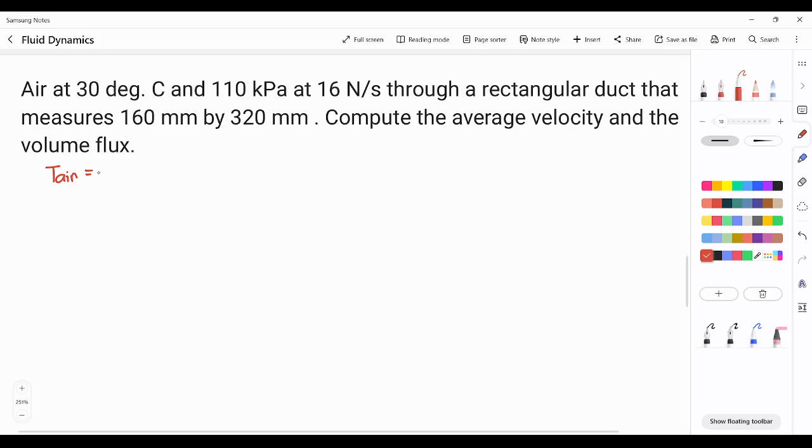Basahin natin, guys. Air at 30 degrees Celsius and 110 kilopascals at 16 Newtons per second through a rectangular duct that measures 160 millimeters by 320 millimeters. Compute the average velocity and the volume flux. So, ano yung given natin? We are given a temperature of air, which is 30 degrees Celsius. We are also given pressure, yung pressure ng air natin, which is 110 kilopascal.

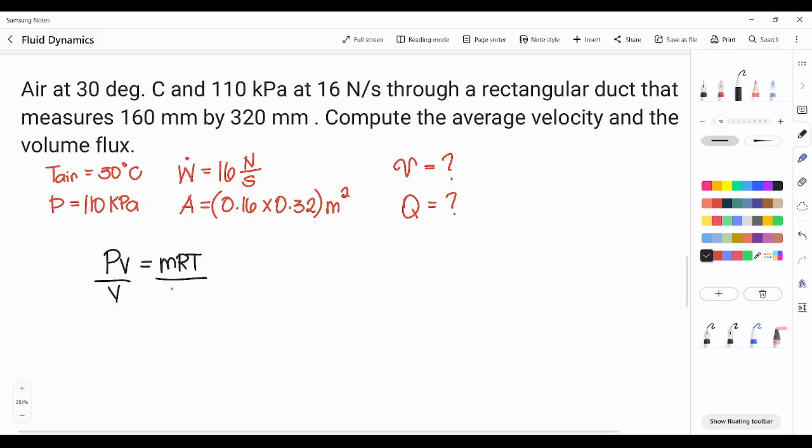Pero pag dinivide natin, divide both sides by the volume. Cancel lang yung volume. Tas mass over volume is what? Density. So, pressure is equal to rho RT. And to get the density is simply the pressure divided by the gas constant R times absolute temperature. Alam natin that gamma or the specific weight is equal to rho g.

So, let's first get the density. The density is equal to the pressure over the gas constant times the absolute temperature. Again, the pressure and the temperature should be absolute when using the equation of state of an ideal gas. In this case, absolute na siguro yung 110 kilopascal since walang naka-indicate na gauge siya. So, 110 kilopascal, which is kilonewton per square meter.

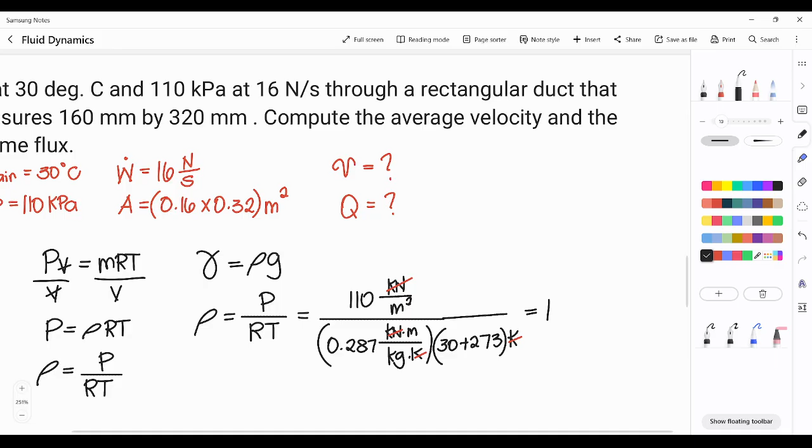And from here, you'll notice na magka-cancel out yung units natin properly. Cancel yung kilonewton, cancel yung Kelvin. Itong meter papasok doon, so that will be cubic meters. Tapos yung kilogram tataas. Our resulting value will be kilogram per cubic meter. That is density. Let's use 4 decimal places: 1.2649 kilograms per cubic meter. So, yan yung density ng air.

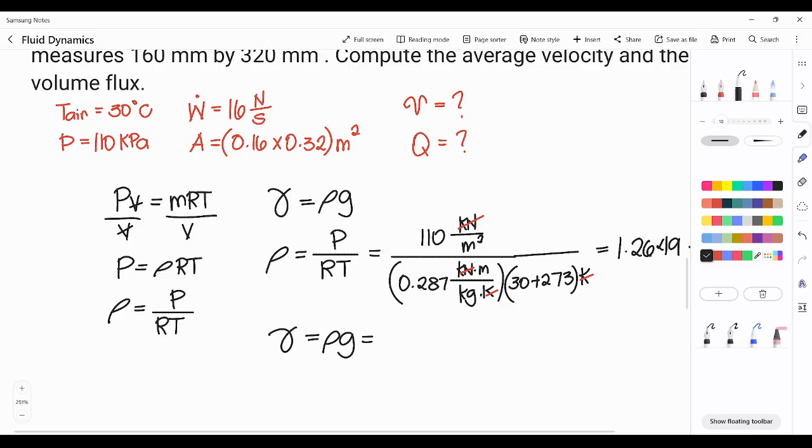So, we can use this formula to find the specific weight. Specific weight ay weight over volume, and weight ay mass times gravity, so mass over volume is density, kaya siya naging rho g. Density 1.2649 kilogram per cubic meter times g, 9.81 meter per second squared. Kilogram times meter per second squared is Newton, so we end up with Newton per cubic meter: 12.41 Newton per cubic meter. So yan yung gamma natin.

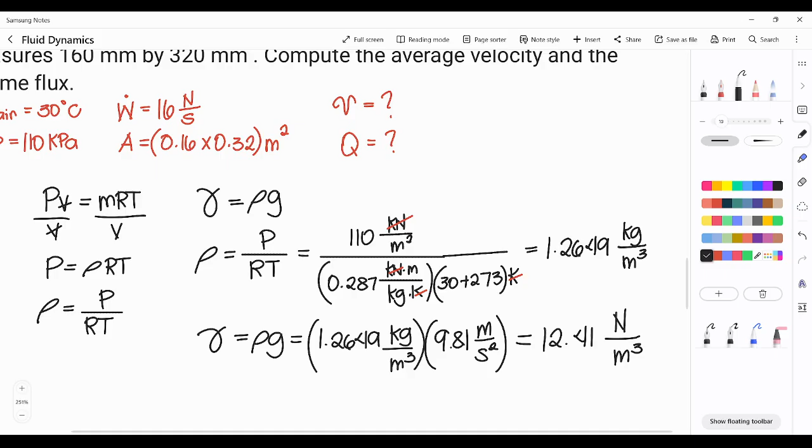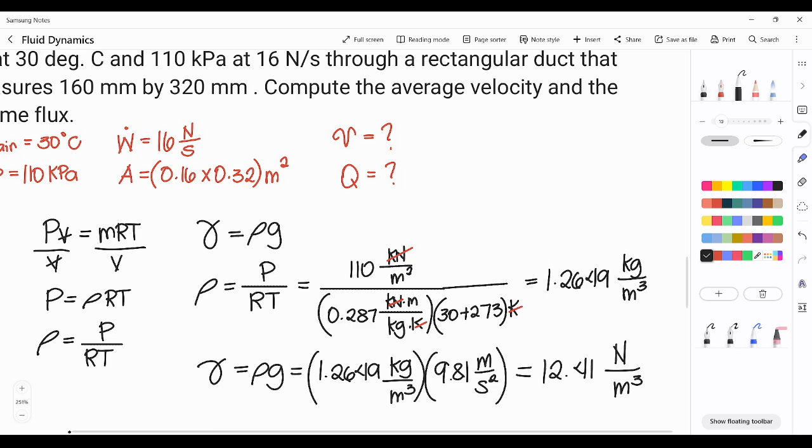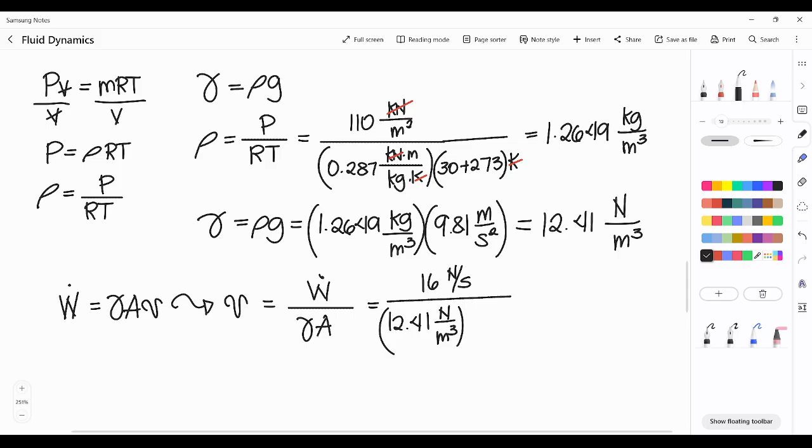So bakit natin kinuha yung gamma? Alam natin na ang formula ng weight flow rate ay gamma times the area times the velocity. Hinahanap natin yung velocity. Rearranging, the velocity is equal to the weight flow rate divided by gamma times area. Weight flow rate is 16 newtons per second, gamma is 12.41 newton per cubic meter, and the area, length times width, 0.16 times 0.32 square meters.

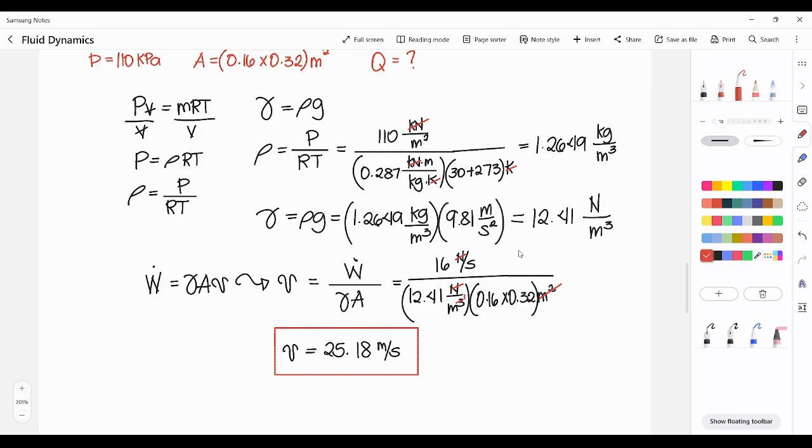So, makukuha na natin yung velocity. Cancel yung newtons, cancel yung square meter, magiging meter per second. Ang velocity natin is 25.18 meters per second. Oops, ang pangit ng sulat. Ulitin natin. 25.18 meters per second. So that is our velocity. Nagamit natin dito yung ideal gas, kasi air.

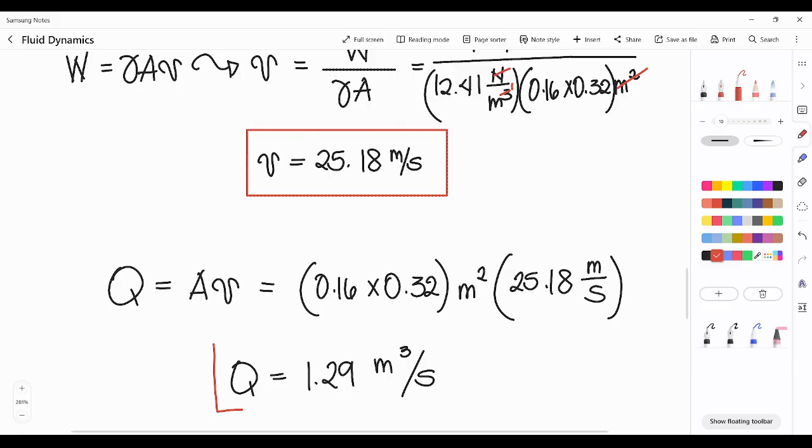Tapos for Q naman, anong formula ng Q? Volume flow rate is equal to area times the velocity. Ang area ay 0.16 times 0.32 square meters times the velocity 25.18 meters per second. The resulting value of Q is in cubic meters per second: 1.2892, or 1.29 cubic meters per second. That is the volume flow rate.

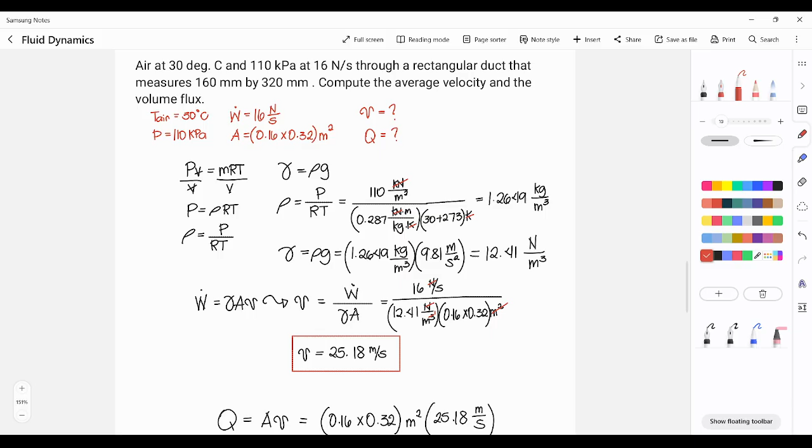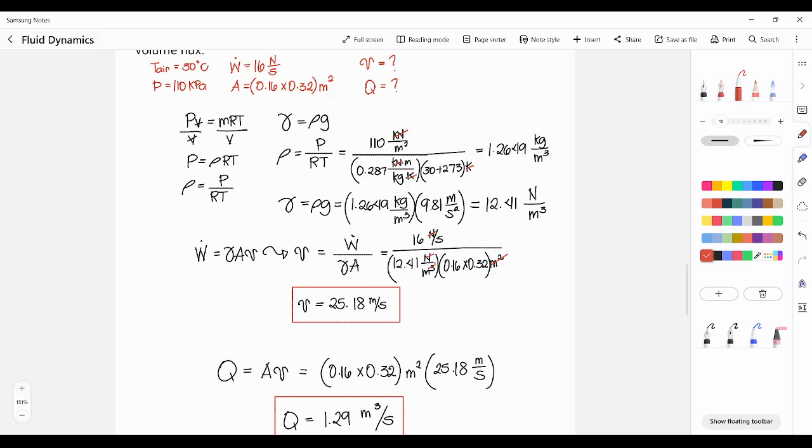Ayan, medyo easy pa yung problem na to, kasi alam mo yung tamang formulas kung saan ka kukuha ng necessary values. Alright, that is our answer: 25.18 meters per second, and our volume flow rate or volume flux is 1.29 cubic meters per second. So that is all.